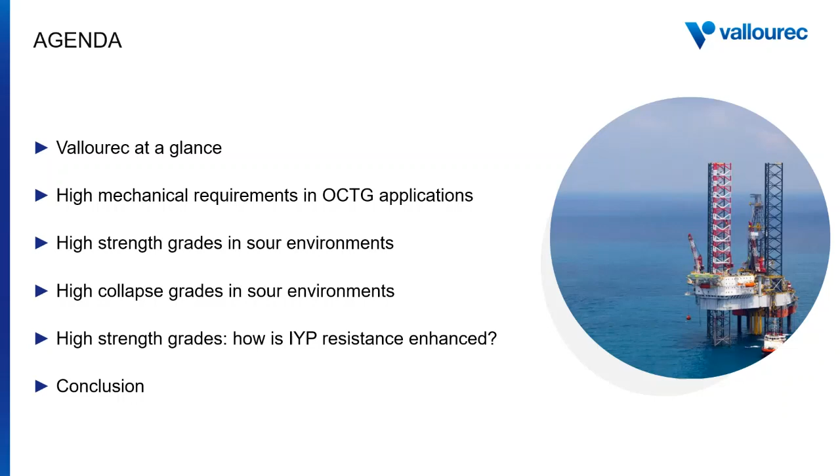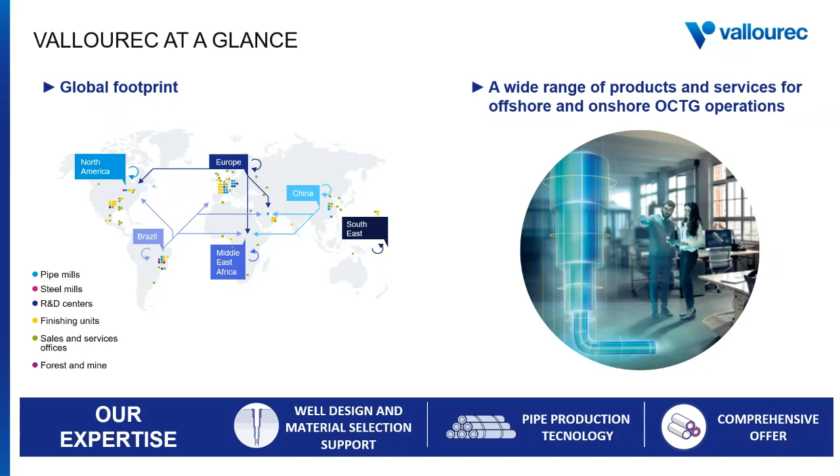Vallourec is a worldwide company with several decades of experience supplying OCTG pipe solutions around the world. We have built a strategic industrial footprint close to our customers to address their needs more locally and deliver your casing pipes faster. Our expertise in material development, well design, and material selection related to OCTG applications, combined with our expertise in pipe processing, are available to support you in your projects.

Let's start with a quick review of the main internal and external pressure challenges encountered by drilling operators.

For many years, oil and gas operators have faced increasingly high mechanical loads during drilling and production operations, such is the case of high pressure, high temperature, or HPHT, wells. The addition of these high mechanical requirements and the high temperature levels that lead to a mechanical derating of the tubulars have led to heavier and more complex well designs that can withstand such demands. In addition to this, sometimes these loads are accompanied by sour environments, adding an extra layer of complexity.

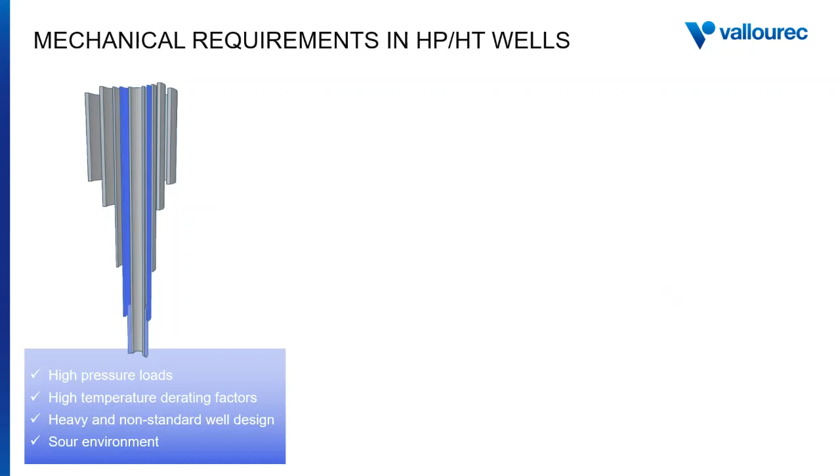In this webcast, we will be focusing on the mechanical loads related to internal and external pressure. When the external pressure exerted on a string is higher than the internal pressure, we are in the typical case of a collapse load.

The main and most challenging collapse loads encountered during the drilling phase are the cementing operations and the full evacuation loads. In the first case, the external pressure given by the column of cement slurry outside of the casing is much higher than the internal pressure exerted by the displacement fluid on the inside. This creates a collapse load that increases from the top of cement towards the bottom hole.

The second case, the full evacuation load case, is considered to be one of the most critical collapse loads, and it represents the complete displacement of the drilling mud out of the wellbore. This means that no hydrostatic column is left inside the casing, so there is no internal pressure to counteract the external pressure applied by the formation, leading to very challenging collapse loads.

The third important load to be considered is the annular pressure buildup, or APB, caused by thermal expansion. During production operations, the temperature of the string increases, leading to an expansion of the confined fluid in the annular space and creating both an external pressure on the inner casing string and an internal pressure on the outer casing string.

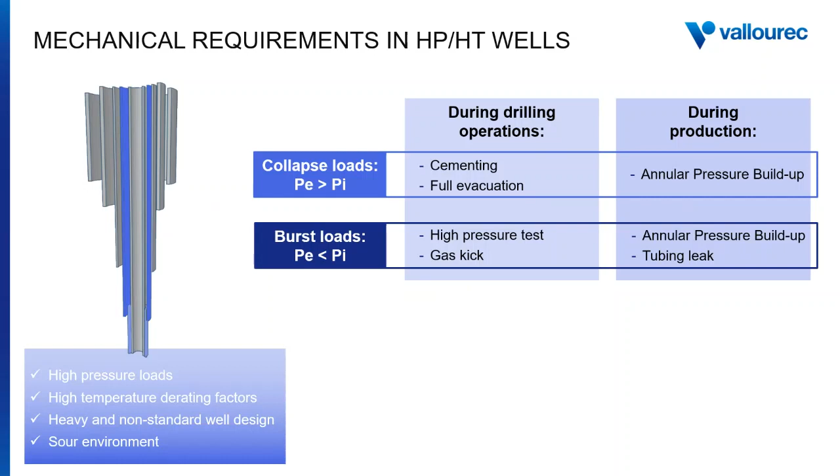During production phase, the most critical burst loads are linked to the annular pressure buildup, as explained previously, and the tubing leak. In this case, it is considered that the production casing is in contact with the formation fluid and suffers an internal pressure that is equivalent to the formation pressure.

We have seen that with the evolution of drilling operations drifting towards offshore, deep water, and HPHT wells, mechanical loads become more and more severe. As a consequence, API grades are no longer able to cover all the requirements, and dedicated proprietary grades become a must.

For this kind of application, Vallourec offers the high collapse and high burst grades up to 150 ksi of a specified minimum yield strength. For environments with H2S, we can find these grades in combination with sour service resistance up to 130 ksi of specified minimum yield strength.

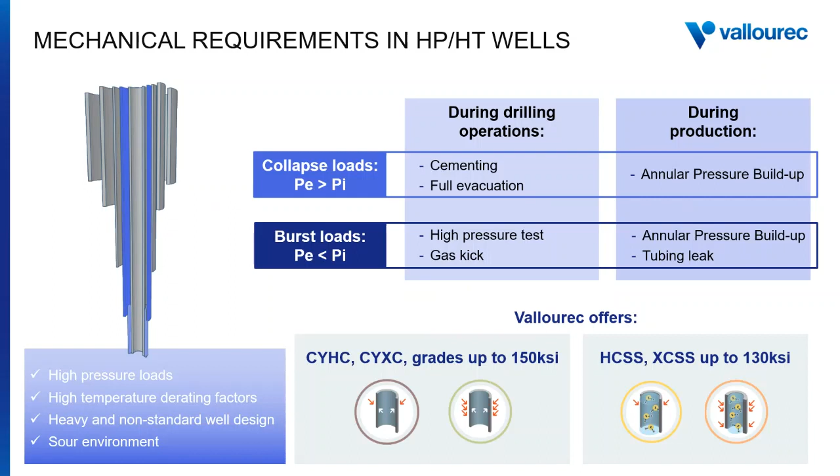Let's see these grades in detail and how they can add value to your operation. Let's start by discussing how the mechanical and corrosion resistance of a tubular interact with each other. The first question I would like to address is, what happens when we are in a sour environment, and why is it so critical for the safety of the operation?

When we are in presence of H2S, or hydrogen sulfide, in combination with water, these chemicals react and release free hydrogen, decreasing the environment's pH. Due to the small size of this molecule, the free hydrogen can penetrate the material, occupying interstitial spaces, that is, spaces that are normally free between the iron and carbon atoms.

Hydrogen embrittlement occurs most significantly, but not exclusively, at local stress locations, which then leads to cracking due to the combination of stress and embrittlement. And so, the material is susceptible of suffering a failure even below its specified minimum yield strength. This phenomenon is called sulfide stress cracking, or SSC, and can happen even at very low concentrations of H2S.

For this reason, the international standard NACE-MR 0175 recommends using sour service grades for partial pressures of H2S that are higher than 0.05 psi or 0.003 bar.

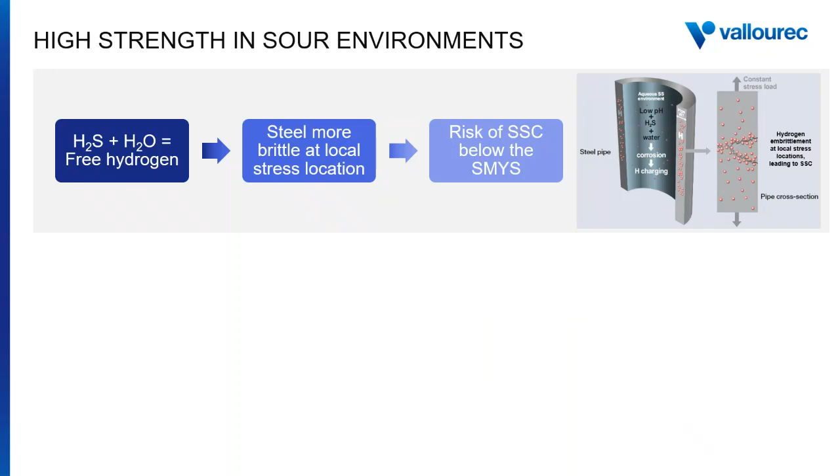Now, how does this impact the well design? When operators are faced with challenging mechanical loads in the well, the natural first answer is to increase the mechanical resistance by increasing the specified minimum yield strength.

However, when in presence of H2S, this is not always possible, since by increasing the mechanical resistance, the material toughness and ductility are reduced, making the material more susceptible to the phenomenon of hydrogen embrittlement, and as a consequence, more susceptible of failure due to sulfide stress cracking. For this reason, dedicated sour service materials are required for such applications.

Depending on the severity of the sour environment, Vallourec offers a wide variety of sour service resistant materials in combination with high mechanical properties. For mild environments, generally regions 1 and 2 according to NACE-MR 0175, we are able to offer mild sour and severe sour grades with specified minimum yield strength up to 130 ksi.

For more severe environments, generally regions 3 and 4, we offer extreme sour and enhanced severe sour grades with specified minimum yield strength up to 125 ksi. All these grades are also available in combination with high collapse and extreme collapse resistance.

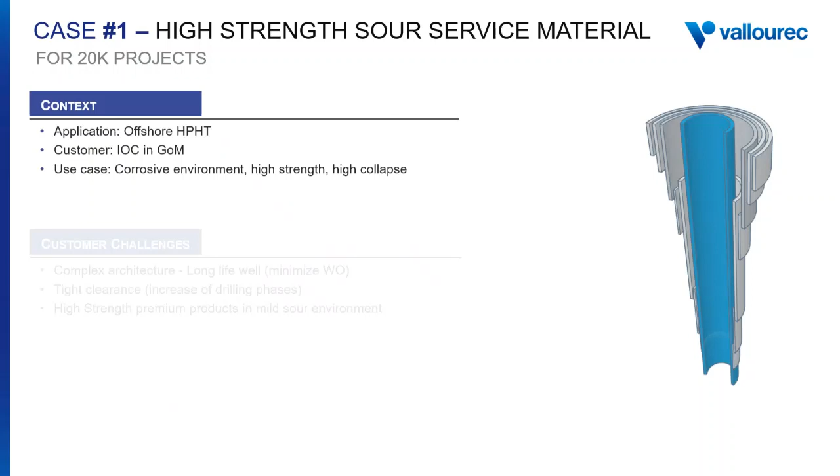Now let's see how, in some real case examples, these grades can support your operations where high mechanical resistance is required in combination with sour service resistance.

For case study number 1, we have prepared an offshore high-pressure, high-temperature case from a customer in the Gulf of Mexico.

In this case, the project was a typical nested well design, meaning that the mechanical resistance of the tubular could not be increased by simply increasing the wall thickness of the pipe due to very tight tolerances between the strings. On the other hand, the highest sour service grade was not enough to meet the external and internal pressure loads, and a dedicated grade combining both high collapse and sour service resistance was needed. As a solution, we were able to offer a grade that combines these performances, acting as a project enabler.

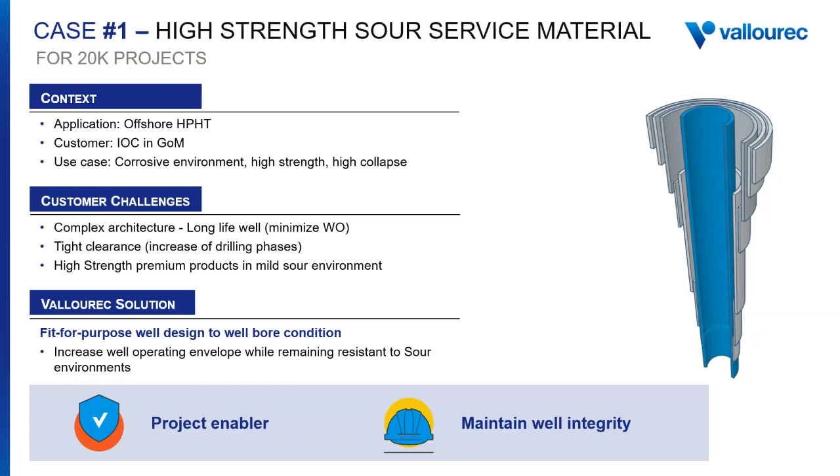Let's see the customer request in detail. From a mechanical point of view, the minimum required burst resistance was 16,200 psi, and the collapse resistance was 16,170 psi. In addition, resistance to a mild sour environment with a pH of 4.5 and a partial pressure of H2S of 0.2 psi was requested.

The customer's original well design included the VM125SS, a sour service grade with a specified minimum yield strength of 125 ksi that has been qualified for this region 2 condition. However, this product could not meet the mechanical requirements, being well below both the internal and external pressure needs. As mentioned before, the only alternative seemed to be to increase the wall thickness, but this was not possible due to the very tight tolerances for the OD and the drift.

As a solution, we were able to offer the VM130 HCMS, a mild sour grade with 130 ksi in combination with high collapse properties. This product not only allowed us to keep the original design but also to increase their safety margins, all while covering the corrosion resistance needed by the customer.

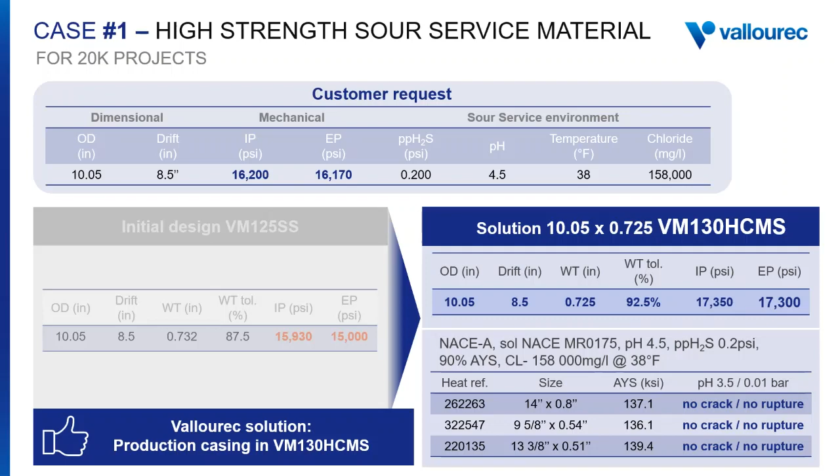Now let's focus on the external pressure resistance of a tubular, and let's discuss how it can be enhanced thanks to our proprietary methodology. For many years, Vallourec has worked on developing and continuously improving a proprietary high collapse methodology to deliver the highest and safest performance in the market, bringing solutions to our customers in all types of applications, from the most standard conventional application to the most critical deep water projects.

Our methodology is supported by 3 stages of design and manufacturing process. The first step is the product design. During our decades of experience, we have identified 5 manufacturing variables that drive the collapse performance of a product. These variables are related to the pipe's geometry, such as wall thickness, ovality, and eccentricity, as well as to its mechanical performance, such as residual stress and yield strength.

Based on our proprietary high collapse model input and our experience, the target values for these variables are set during the product design process and then controlled during production in order to guarantee that the targets are met. Generally speaking, the tighter and more controlled these parameters are, the higher the collapse rating of the production will be.

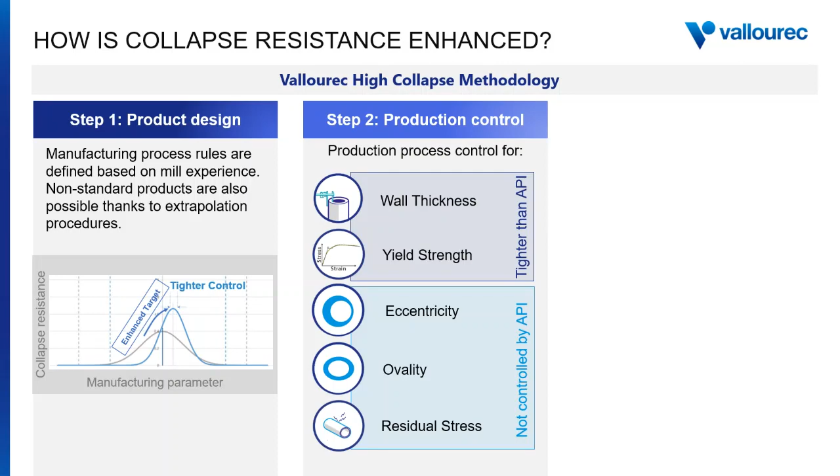Then, quality control is performed applying individual pipe analysis. Each and every high collapse pipe is inspected with an automated system to 100% surface coverage with high resolution for both external diameter and wall thickness, a much more complete inspection than API requirements.

In a word, this proprietary quality control procedure guarantees that every single pipe from the production lot is inspected and verified to achieve the targets set during the product design. In addition, regular random physical collapse tests are run according to Annex I of API 5C3 requirements in order to give continuous feedback on our model. All these steps allow Vallourec to offer the highest and safest collapse ratings in the market.

We have seen more recently operators asking for higher and higher external pressure resistance, many times above what standard high collapse products could offer. As an answer to this, Vallourec has developed the Extreme Collapse offer, a premium alternative for heavy and complex well designs.

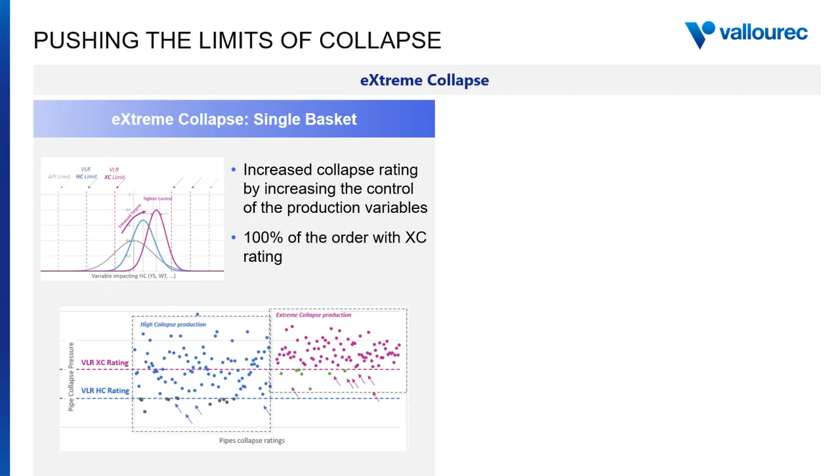Now, let's evaluate the second alternative: the dual performance basket methodology, which consists of identifying and segregating the most performing pipes of a production lot by means of accurate dimensional pipe data and individual pipe performance prediction.

In this way, the most performing pipes are identified and physically sorted into the premium basket with a higher extreme collapse rating. This basket is then placed by the operator into the most demanding sections of the well. The remaining pipes are part of the regular basket and assigned the standard high collapse rating, and then placed by the operator on less critical well sections.

In summary, the extreme collapse offer can represent a project enabler for cases where the collapse loads are beyond standard and high collapse grades cannot meet the needed requirements, or even to make the operation safer by increasing the safety margins. In addition, it can allow operators to switch to a lighter weight, leading to a simpler operation by increasing the clearance of the string.

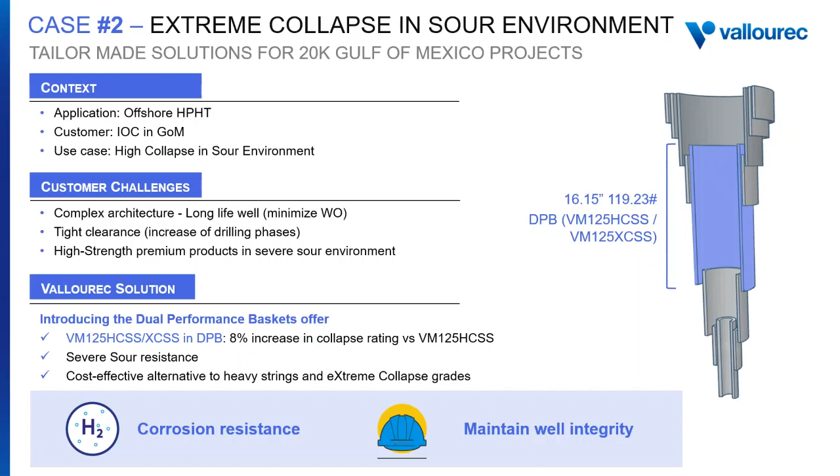Let's focus first on the operator needs: a tubular combining severe sour resistance with a minimum collapse resistance of 5,850 psi. It is important to mention that, in this case, the external pressure increased with depth, and this elevated collapse resistance was needed only on the bottom half of the string.

Let's look at the different alternatives this customer was considering. The original design was 16.15 inches, 119 pounds per feet of weight, and a drift of 14.6 inches, on the highest available grade combining both severe sour resistance and high collapse performance, a VM125 HCSS. However, we see this alternative offers a collapse rating of 5,650 psi, well below the minimum requested of 5,850.

This resistance could be enhanced by increasing the wall thickness. We see that by moving to 127 pounds per feet, the collapse resistance is increased to an acceptable value of 6,940 psi. However, this alternative is not acceptable to the operator since the drift was reduced to a value that could severely complicate the drilling of the next section.

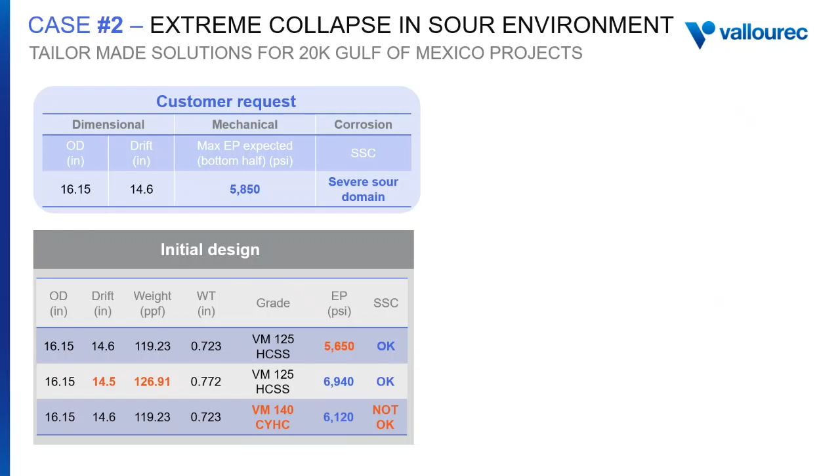The only alternative left was to move to a higher non-sour grade. We see that by keeping the original weight of 119 pounds per feet and switching to a VM140 CYHC grade, we are able to achieve a collapse rating higher than the minimum requested. However, this grade does not offer sour service resistance, and the risk of failure due to sulfide stress cracking is considerable. So, in one word, there was no solution at the time for this customer's challenges.

Since the elevated collapse loads were found only on the bottom half of the string, having 50% of the string with a higher collapse rating was enough for this project, and the dual performance basket on a VM125 HCSS became the solution to offer both mechanical and corrosion resistance for the customer.

As a reminder, this methodology consists of identifying and segregating the 50% most performing pipes of a standard high collapse production into what we call the extreme basket, which is then placed by the customer where the collapse ratings were expected to be the highest.

The remaining 50% of the order was segregated into the regular basket with the standard HC rating, and then placed by the operator in the less demanding sections of the string. This means that rejection rates remain at very low values, and this extreme collapse performance is achieved at a marginal cost related mostly to the logistics of segregation.

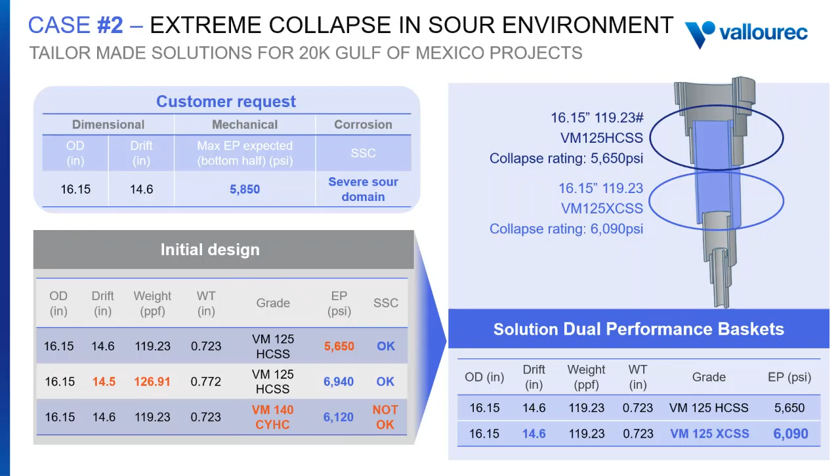Now, let's analyze how the internal pressure or burst resistance can be enhanced on a tubular. According to the MIYP model, burst resistance is mainly driven by two parameters: the wall thickness and the yield strength of the tubular.

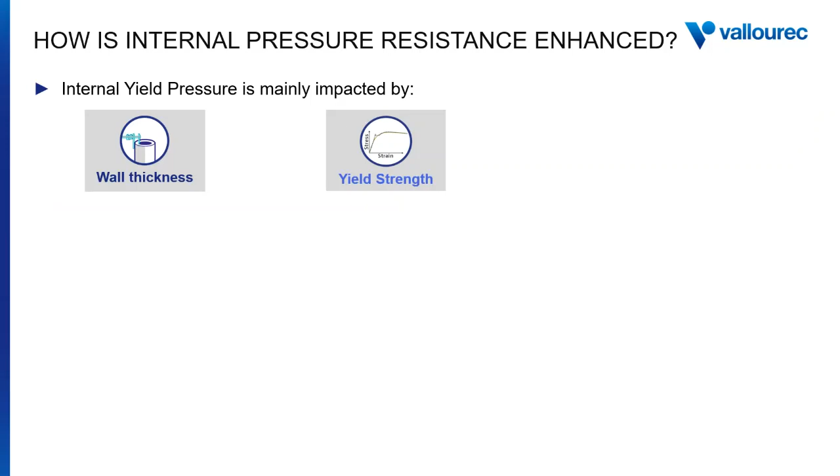This means that one way to boost internal pressure resistance is by increasing the remaining body wall, or RBW, of the pipe. The international standard API 5CT requests a minimum of 87.5% remaining body wall, but by increasing it to, say, 92.5%, the burst resistance can be greatly increased.

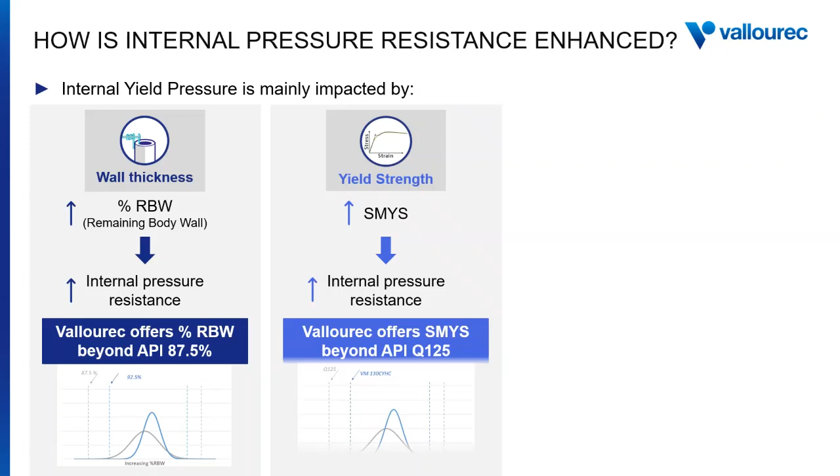The second alternative to boost burst resistance is to increase the specified minimum yield strength of the grade. However, API products can only offer a limited yield strength, with Q125 being the grade with the highest specified minimum yield strength according to API 5CT.

In order to offer an alternative, Vallourec has developed 4 dedicated grades with higher yield strength levels called CY, or controlled yield grades. Three of them, VM125CY, VM130CY, and VM140CY, are 100% compliant with API Q125, meaning they cover all the requirements plus having more restricted values of yield strength in order to offer enhanced burst resistance.

However, for some challenging projects, this was just not enough, which is why we developed the VM150CY with an SMYS of 150 KSI, the highest in the market. In one word, today we are able to offer a solution to your most challenging burst requirements thanks to a combination of higher than API specified minimum yield strength and remaining body wall.

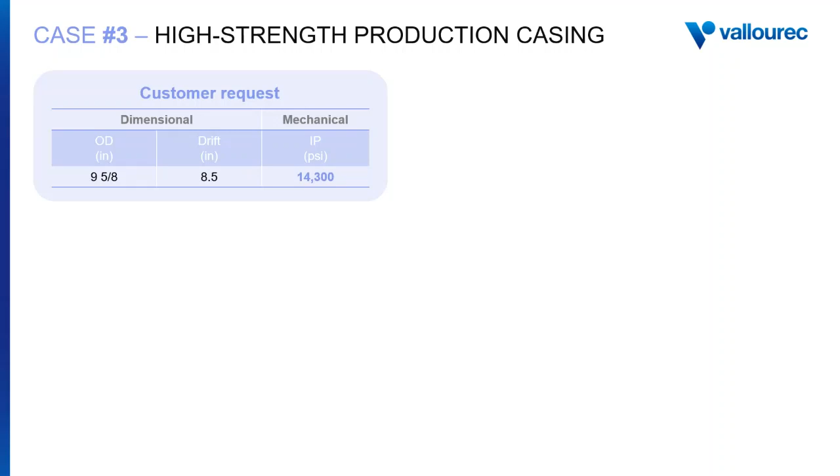To summarize the customer requirements: a maximum OD of 9 5/8 and a minimum drift of 8.5 inches were mandatory, while achieving a minimum burst resistance of 14,300 psi.

The customer's first choice was a Q125 grade with a minimum remaining body wall required by API of 87.5%. But the burst resistance was 12,390 psi, well below the minimum requirement.

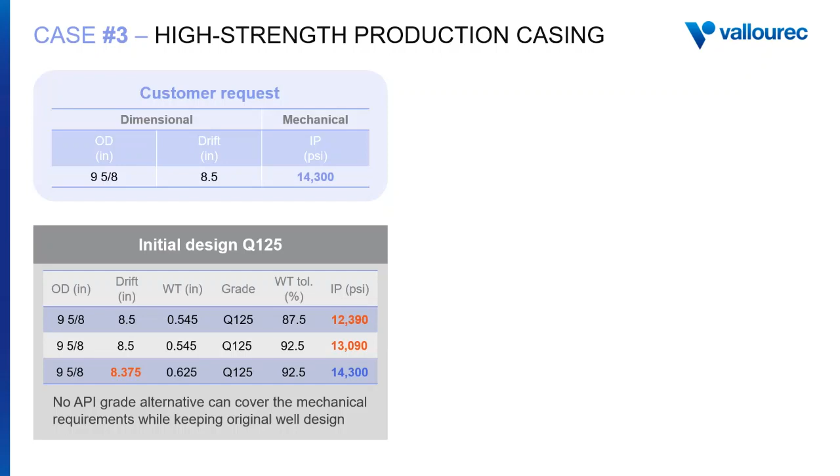Even by increasing the remaining body wall up to 92.5%, the internal pressure resistance was not enough, leaving the operator only with the alternative to move to a thicker tubular and reduce the drift, which was not acceptable by the operator. In one word, the API grades were not able to offer a solution.

Thanks to a combination of our VM140CY grade and a remaining body wall of 92.5%, we were able to offer a minimum guaranteed burst resistance of 14,670 psi, an alternative that allowed the operator to keep the original well design while maintaining the needed safety margins.

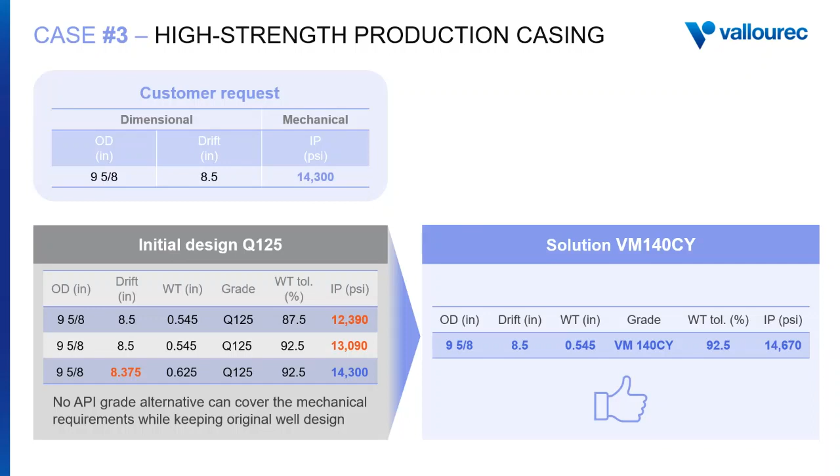During this webcast, we have mentioned several different grades with different combinations of mechanical and corrosion performances, and I would like to finish my presentation by summarizing our high strength offer. API grades offer limited collapse and burst resistance that, as we have seen, is often not enough for several applications, particularly for high pressure, high temperature wells.

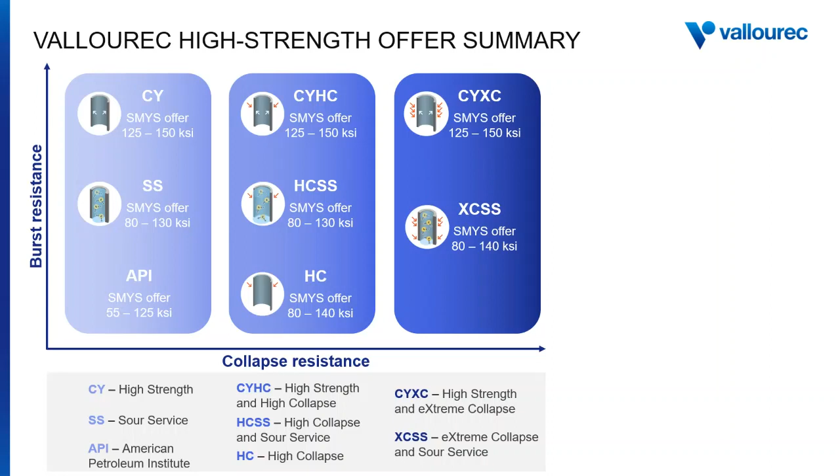Our high-strength offer covers the OD range from 4.5 to 26 inches, including non-standard sizes, and all products are qualified with our proprietary VAM connections.

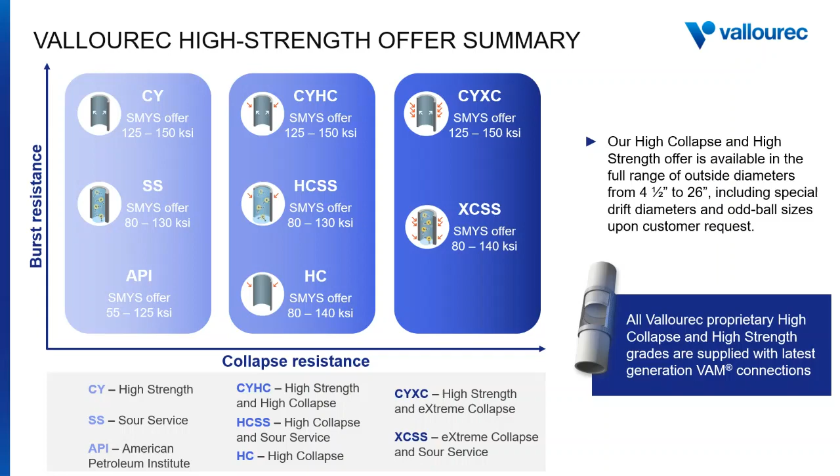But how do we qualify our VAM connections? All our VAM products are validated following the latest and most severe testing standards, such as API RP 5C5 2017 and ISO 13679 2019, as well as the most rigorous R&D criteria.

This involves a very detailed performance demonstration and extensive testing on critical configurations in terms of geometry, size, grade, torque, temperature, and others.

This includes as well physically testing the connection to the highest actual collapse rating, a point that is particularly critical for high collapse and extreme collapse products, and leading to a comprehensive validation for the most severe requirements.

Some examples of our severe qualification procedure are the qualification of VAM 21 with VM 125 and 110 high collapse sour service grades for critical onshore salt dome applications in South America, and the qualification of VAM SLIJ 3 with VM 140 high collapse and high strength grades and 130 high strength for a challenging high pressure, high temperature and deep water wells in Gulf of Mexico.

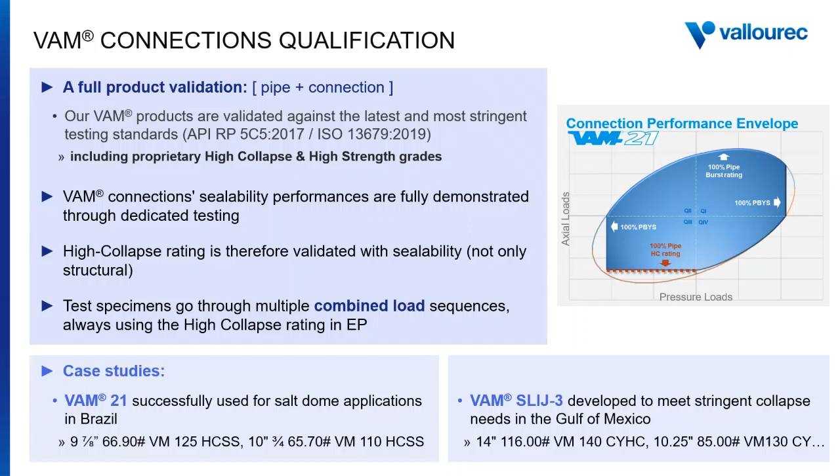So, in order to guarantee that you have access to the safest and most reliable product, make sure you request the connection qualification test reports from your high collapse supplier.

Well design optimization is a complex challenge with so many important parameters that need to be taken into account. At Vallourec, we have a multidisciplinary team of experts to help you make the right choice from our wide portfolio of materials and connections. We are here to help you from the design phase of your project through to fit-for-purpose testing, controlling every step of the process to ensure that you optimize the well design and enhance well integrity. This is the value of our service, and this is where we can deliver really cost-effective solutions.

Thank you for listening. I am now ready to take your questions.

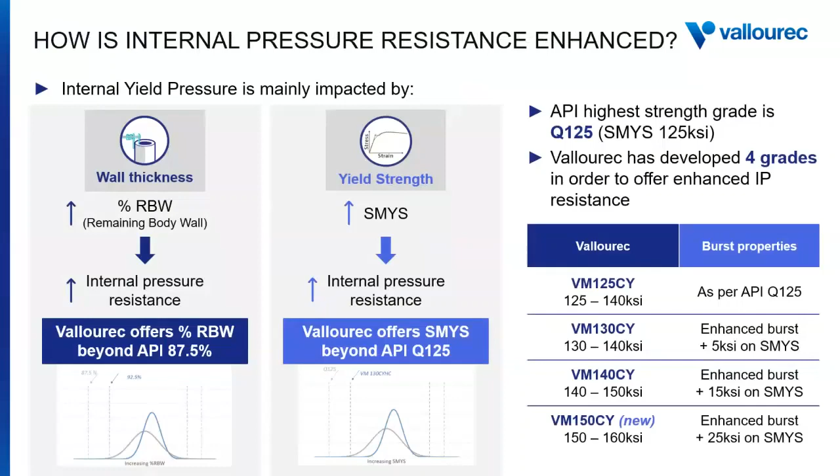This is the slide I was looking for. So it's actually a very good question. What we were saying before is that in order to obtain, let's start from the basics, let's start from API products - we said that in order to obtain high collapse products, we need to target tighter manufacturing rules, and then we get the high collapse products. Of course, the fact that we are moving from the API manufacturing rules to tighter, more controlled, more demanding, more challenging mill manufacturing rules, this is going to bring a cost.

And this cost is related mostly to rejection rates. The more demanding the manufacturing rules or targets are, the higher the rejection rates are going to be at the end of the day. So if we target even tighter manufacturing rules in order to achieve this extreme collapse single basket solution, then the rejection rates are going to be higher than the standard HC grades, which means that the final cost, related mostly but not only to the rejection rates, is going to be higher. So to put it very simply, the extreme collapse single basket is going to be more expensive than the standard high collapse product. That is on one side.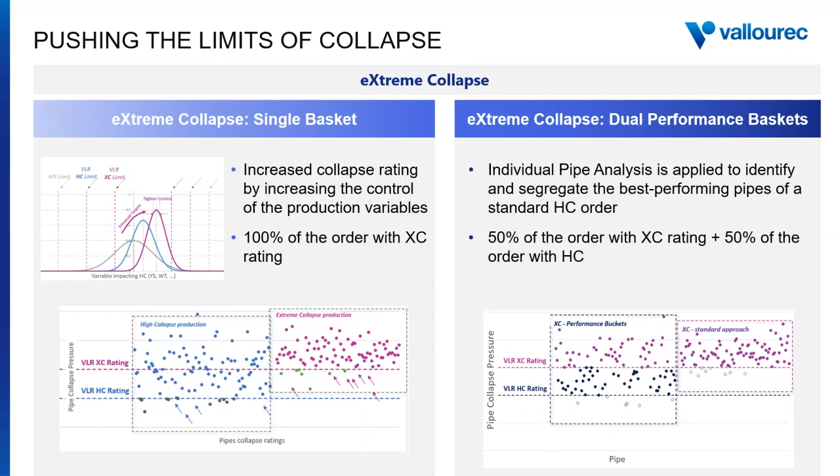And maybe I'm just going to put this slide. So I was just now discussing about this step 3. However, there is also the production control. So yes, we control tighter than for API, but we produce tighter than for standard API.

So for example, what I mean is that for the wall thickness and the yield strength, parameters that are set in API 5CT for different products, we control even tighter than that, which means that the wall thickness we control tighter in order to push it to the upper limit of the range accepted by API, and so is the yield strength. So we are still compliant with API, but we are pushing the limits even tighter in order to obtain this higher collapse rating, okay?

And that is also the case for eccentricity, ovality, and residual stress, that are not controlled in API products, but for high collapse products, we control it. It's part of our process. So we do not only control in the quality control or inspection section, but also during production, we need to target more restricted and more challenging manufacturing rules or processes, in order to actually achieve higher collapse ratings.

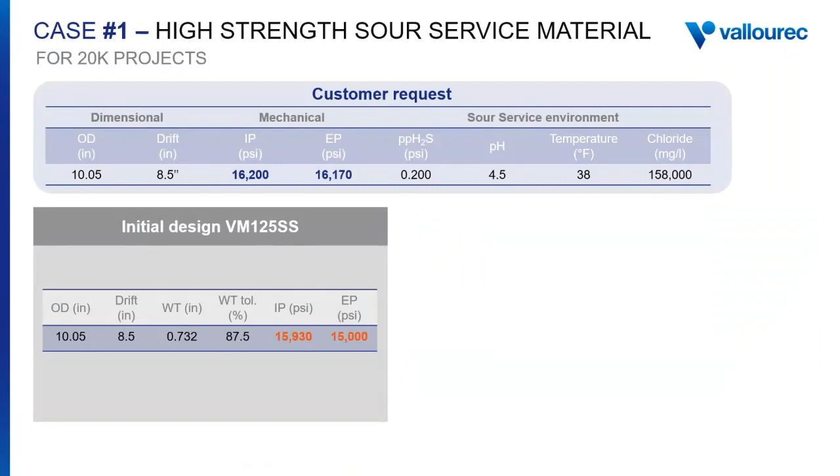This is related to the discussion we had on this slide because we said that when the material becomes more brittle, the risk of cracking due to the presence of H2S becomes greater. Another thing to consider is that the material also becomes more brittle at low temperature. So normally when we talk about the sour service resistance of a material, it's because we perform the NACE test at the lowest temperature the material is expected to see, either room temperature or seabed temperature.

So the CY grades, high strength grades, are not supposed to be used at such low temperatures. They do not have sour service resistance at 4 degrees or 24 degrees. However, the yield strength is more restricted - for example, the VM125CY goes from 125 to 140 KSI. The fact that we cut it at 140 and not at 150 KSI means the risk of the material losing toughness due to this very high yield strength is more controlled.

So CY grades can be used in some sour environments at high temperature levels - not at 24 or 4 degrees, but at high temperatures, from the top of my mind around 80 degrees or something like that, depending on the grade. Then the 150 grade, I think, starts at 107 degrees. So they can be used in mild sour environments at high temperature levels.

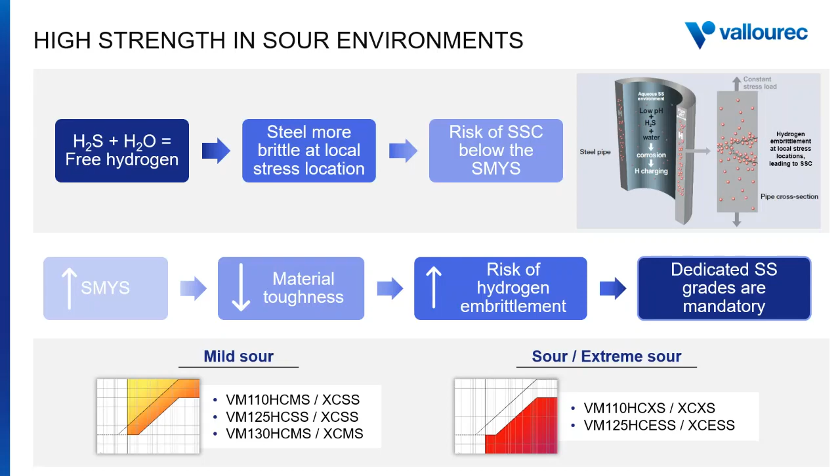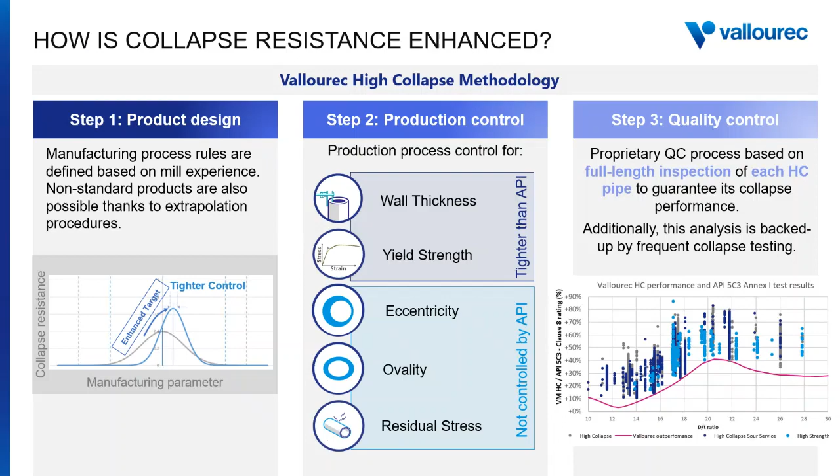If you have a particular project where you would like to use CY grades and you have sour environments and would like to know if it's feasible, please contact me. My email is on the last slide, and we can share the corrosion test results that we have and guide you on whether CY grades could be used or not, and what could be used instead if that's not the case.

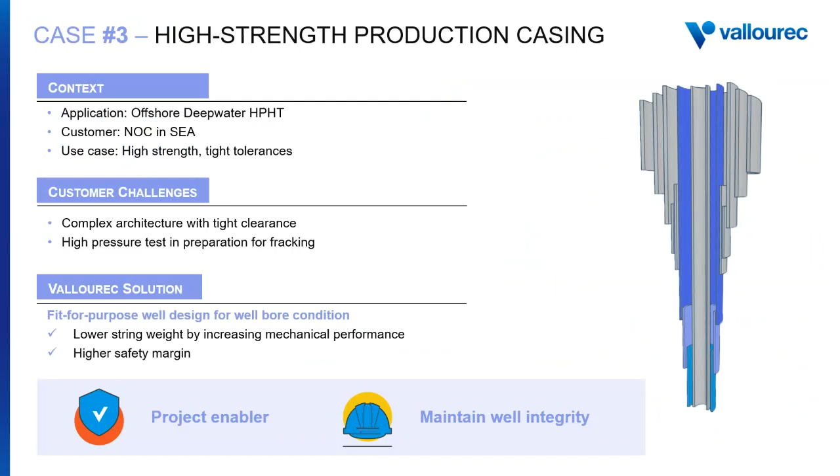Okay, so now switching a little bit to high collapse again. The question is: are collapse tests performed to failure, or an additional external pressure test to the rating or pressure above the rating? So the question is if we perform physical collapse tests up to failure or not.

It is very important to perform the test up to failure in the case of collapse grades, because internally it's important for us to give feedback to our proprietary model, to adjust it and give continuous feedback over time. So it's important, and we do it as a standard rule in all our Vallourec mills.

Then there are some products that are very commonly sold, so we have a very vast database of collapse tests. In those cases, we can discuss with the operator to see if we could perform a waiver on the testing for this kind of product, and it's always with the okay and agreement from the operator.